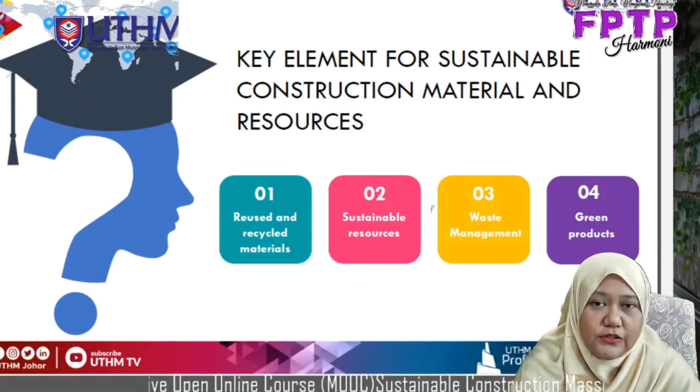My name is Norpadzlihatun Manap, and I'm your lecturer for this course. Today we are going to learn about construction material and resources. When we are talking about sustainable construction, it's very hard if we don't talk about material, because construction requires material. And if we want to make a difference in the future, we must be careful about what kind of material we are going to use in our construction projects.

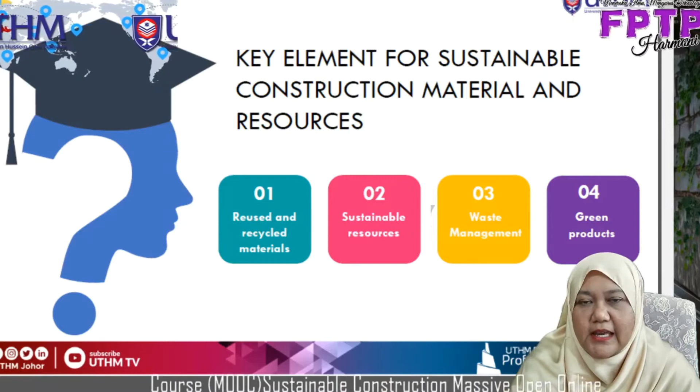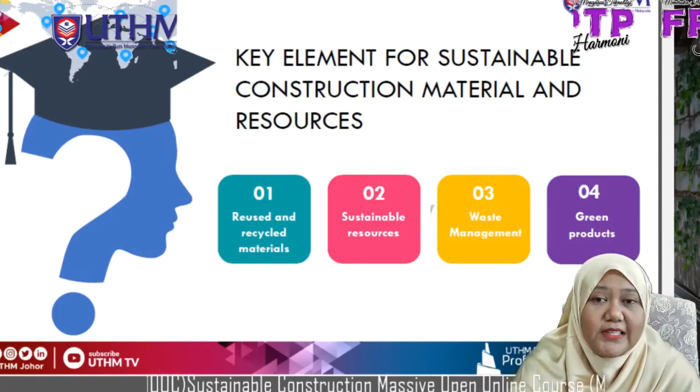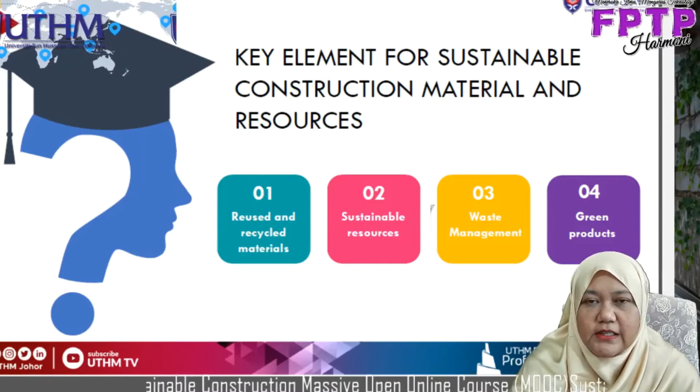So what are the key elements if we want to have sustainable construction material and resources? I suggest you look for these 4 key elements. First element is reused and recycled materials. The second element is sustainable resources. Third is waste management, and fourth is green products. If you focus on each of these 4 key elements, you will somehow make your construction project sustainable.

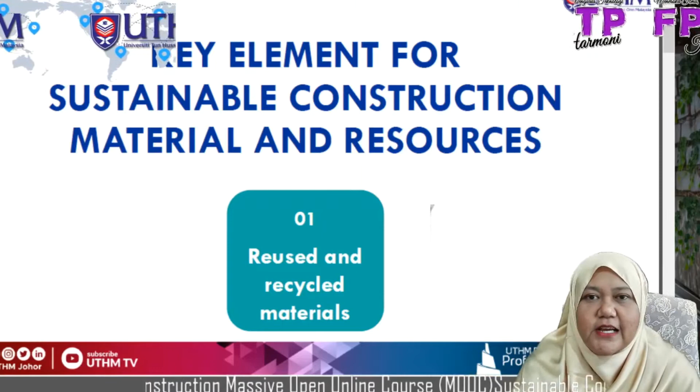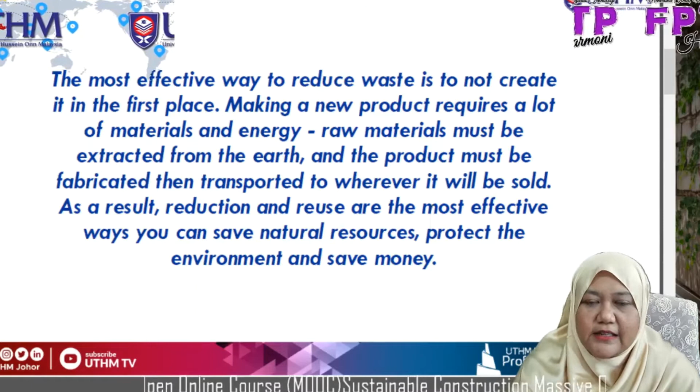So we move on to the first key element, which is reused and recycled materials. The most effective way to reduce waste is not to create it in the first place. Making a new product requires a lot of materials and energy. Raw materials must be extracted from the earth, and the product must be fabricated, then transported to wherever it will be sold. As a result, reduction and reuse are the most effective ways you can save natural resources, protect the environment and save money.

So this paragraph is actually trying to tell you, please, whether not to create any waste or reduce your waste during the construction stage. There are a couple of processes that are required during construction of a project, which is the production, then fabrication, and then transportation.

So if you take a look at each of these stages of construction and find what are the most important things that you can reduce or minimize the waste in each stage, you will have a sustainable construction project, which eventually will be environmentally friendly and save you money.

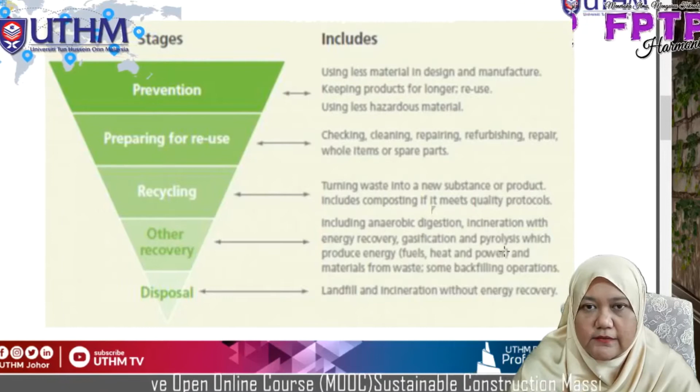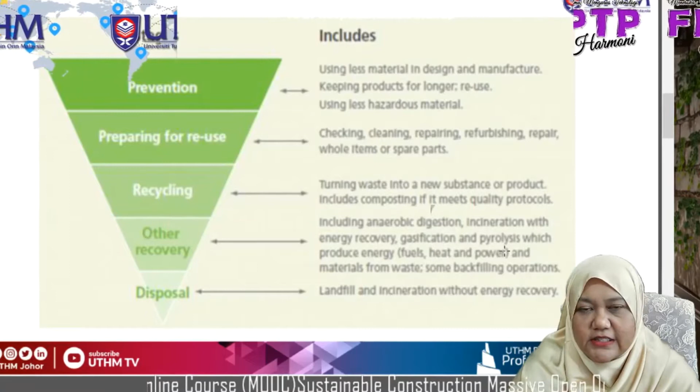These are the stages during construction that you can take a look at in detail. First stage is prevention. Second stage is preparing for reuse. Third stage is recycling. The fourth stage is other recovery, and last is disposal.

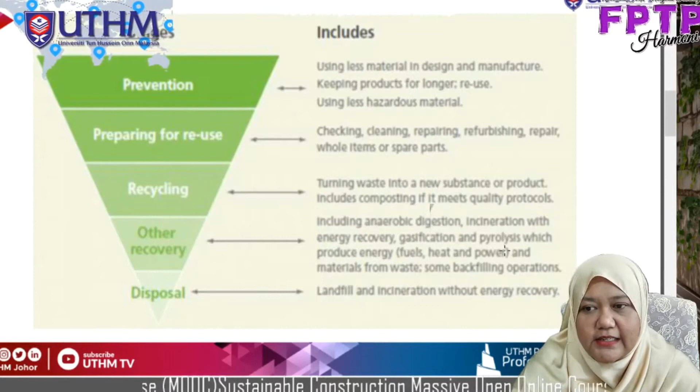When we're talking about prevention, it means that you are using less material in design and manufacture. It will keep the products for longer and will use less hazardous material.

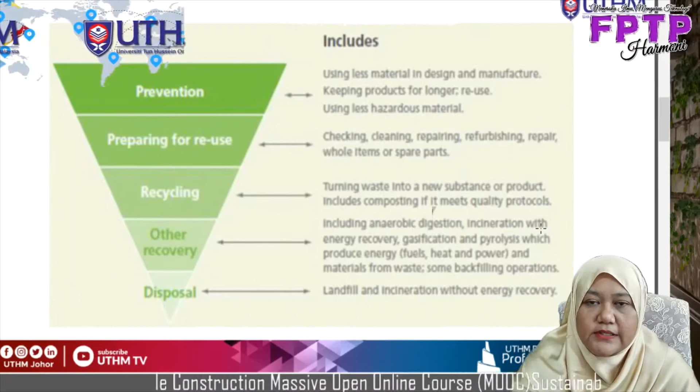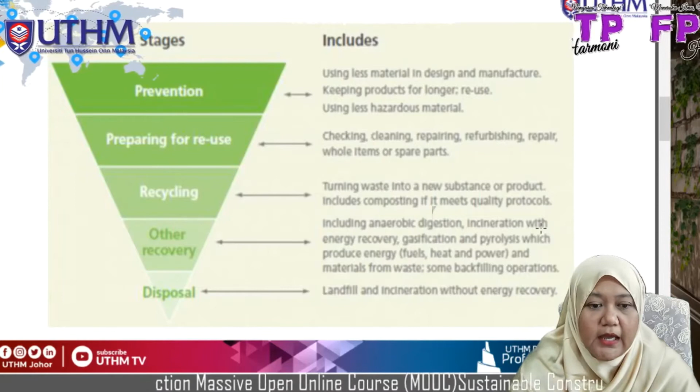The second stage is preparing for reuse. You need to check, clean, repair, refurbish whole items or spare parts.

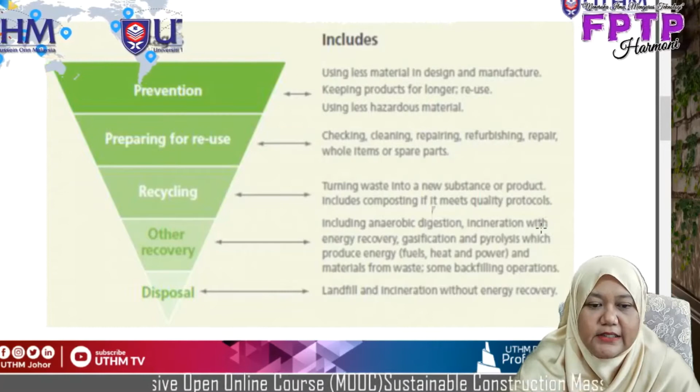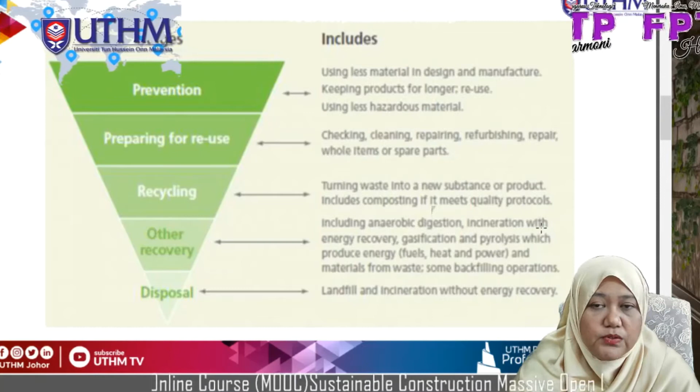The third stage is recycling. You are going to turn waste into a new substance or product. This will include composting, if it meets quality standards and protocols.

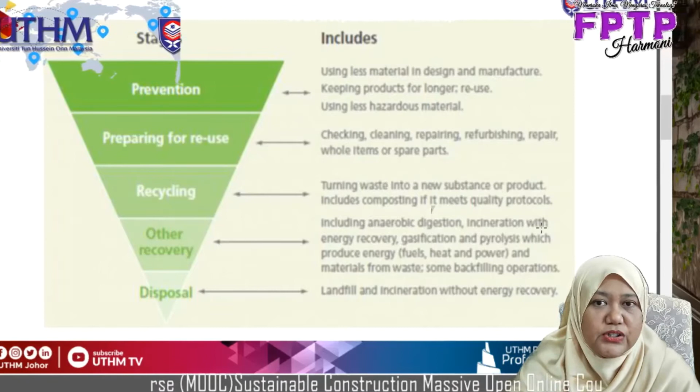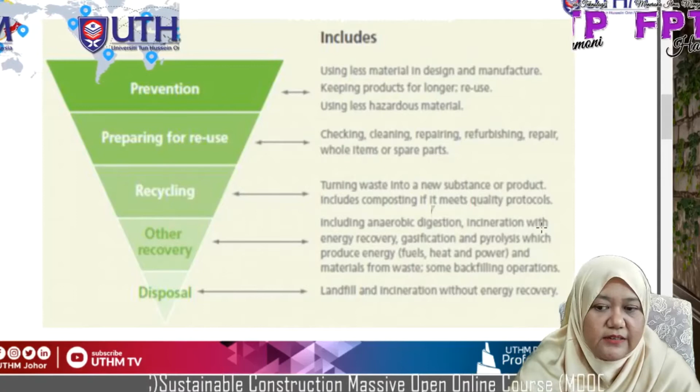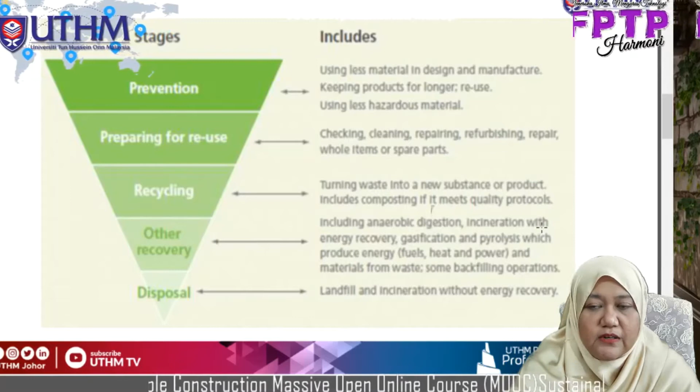The fourth stage is other recovery. This will include anaerobic digestion, incineration with energy recovery, gasification, and pyrolysis, which produce energy in the types of fuels, heat, and power, and materials from waste, and some backfilling operations.

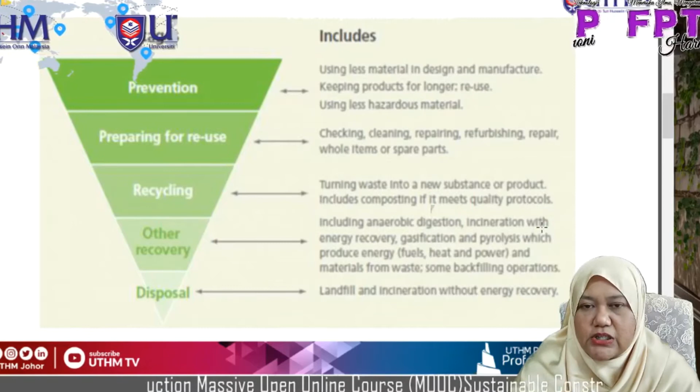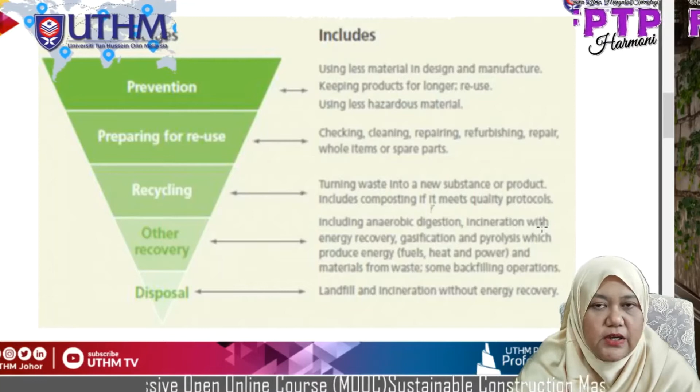And the last stage is disposal, which means all of your waste are going to be transported into landfill and be incinerated without energy recovery.

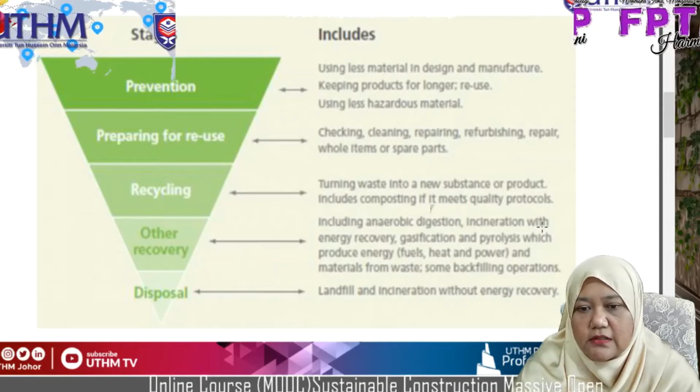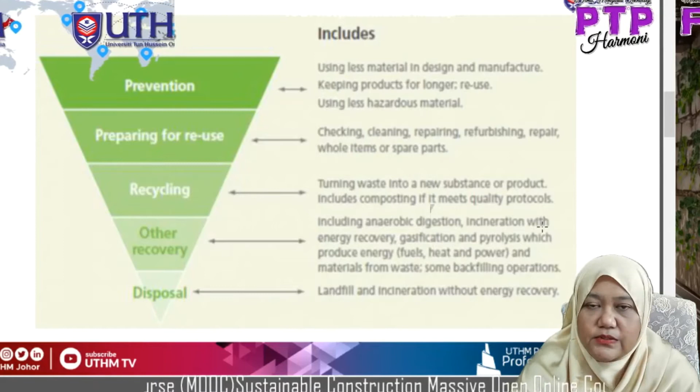So you need to make a decision on which of these stages you are going to focus on, whether prevention, preparing for reuse, recycling, other recovery, or disposal.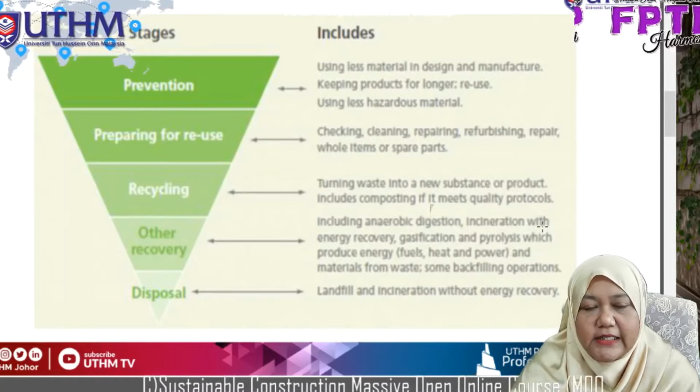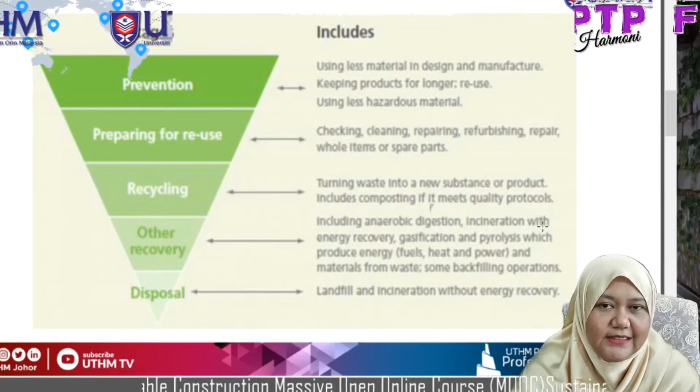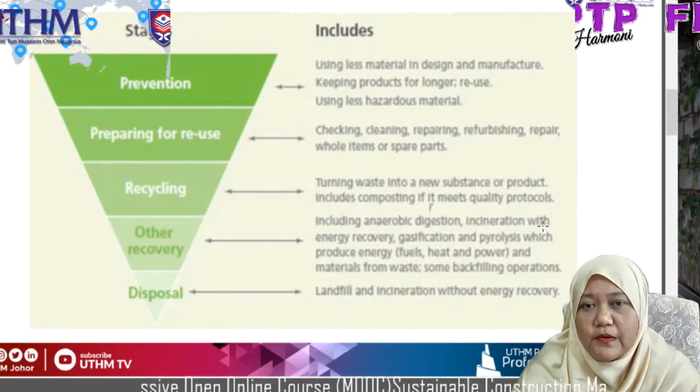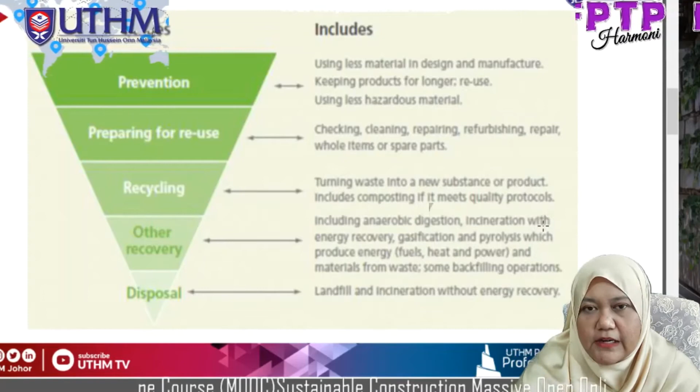It is very common currently in our country that all construction materials that become waste usually come in very bulky items and are hard to recycle and to be disposed of. It would be very beneficial and environmentally friendly if you can find a way to prevent or to minimize this waste.

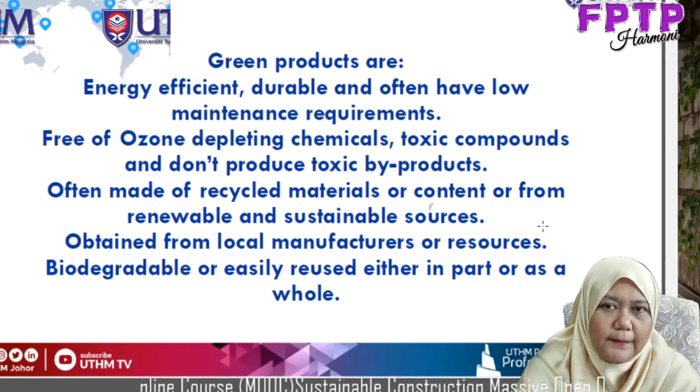I hope you can remember what are the 4 key elements if you want to focus on sustainable construction material and resources. I will have a quiz at the end of this topic.